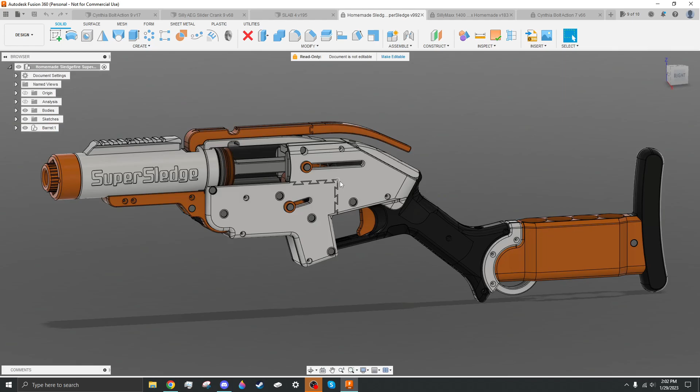You can use dovetails to attach larger prints. So if you have a large flat panel of some type, like this on the old Super Sledge design, you can split it in half and dovetail it together.

You can also use dovetails to make something removable or detachable. So on the Cynthia, on this older version of the Cynthia, I should say, I have a dovetail here to make the stock easier to remove.

And then on the SillyMaxx 1400, there is a large dovetail all the way down the length of the back of the blaster. And that's so you can remove that top cover and get to the air tank inside.

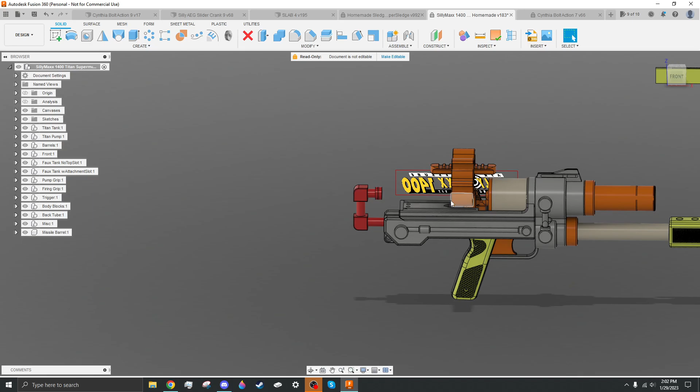And then, of course, you can use dovetails in addition to screws to just give something extra little bit of rigidity. So here on the slab stock, there are dovetails in between all of the core panels, as you can see there. And that isn't strictly necessary with how the screws are laid out.

You could totally build this blaster without any dovetails and just have screws hold it all together. But using dovetails removes some screws from the design, lowering hardware cost and making it easier to assemble.

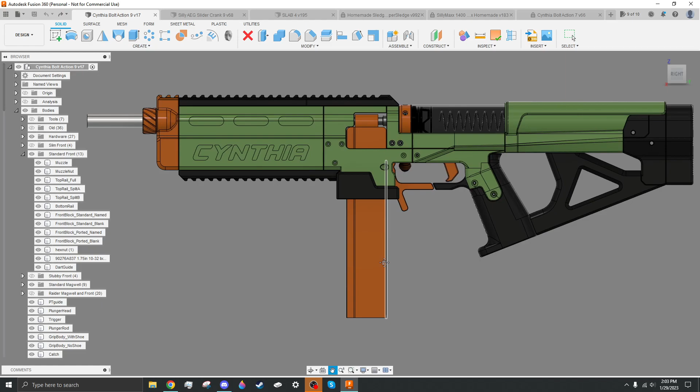So let's start going over the specific examples I have here, and I will at some point in this video show you how to make a dovetail. Most of this is going to be talking about the decision process to decide that you want to use a dovetail in a place versus actually making a dovetail, because making a dovetail is incredibly easy. In fact, it's so easy, I'm going to just start off with that.

So let's make some parts here. Let's make a nice rectangle and another nice rectangle of some type. Yeah, there you go. There's your rectangles. Those are pretty good rectangles.

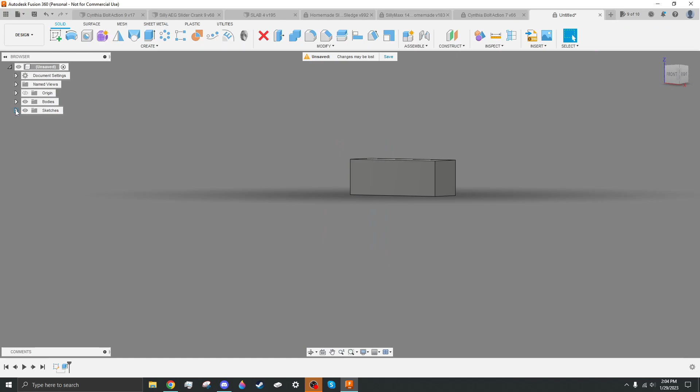So let's say that these are two separate parts. This is that, and this is that, let's say. And you want to attach these two parts together.

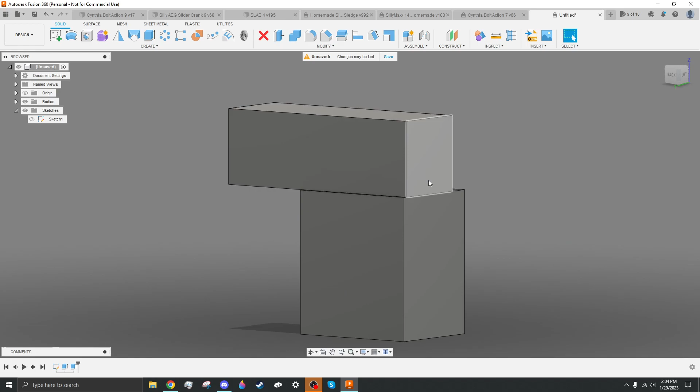Well, first of all, you could drill screws in from the top down, but that makes it so that it costs more hardware, and it might be misaligned and stuff like that. Or it might be wonky orientation. So if you have screws coming in from the side, like from up here, a screw there and a screw there, but it's printing on this face, then you have to print those screw holes in a vertical position, which doesn't often cause issues, but it can cause issues from time to time.

So let's use a dovetail. I want to take these two parts, and I want to make a dovetail. So what I generally do is I find the center line of the top part, or of a part, find the center line, and then what I'll do is I'll make one half of the dovetail and then I'll mirror it.

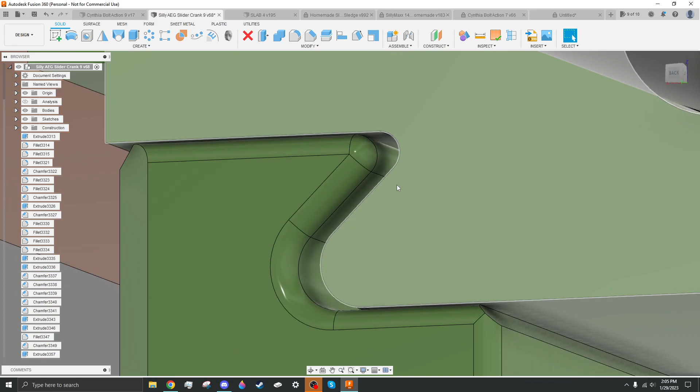On some designs, like this one of my AEG designs, you don't really need a symmetrical dovetail. You can have a dovetail that just has one pointy bit instead of a pointy bit on both ends. And that can be easier to print in some cases, but it's also just not necessary to have both ends of a dovetail be pointy.

So, whatever. I'll go over both sides pointy just for sake of explanation. So I want to make this dovetail go down here. Let's say 5 millimeters. Let's say 10 millimeters. Let's say 20 millimeters. I didn't use scale when making this, so I didn't recognize how large this is, but yeah. 20 millimeters. Let's go another 20 millimeters that way. Let's go down, I don't know, 10. Yeah, it seems fine.

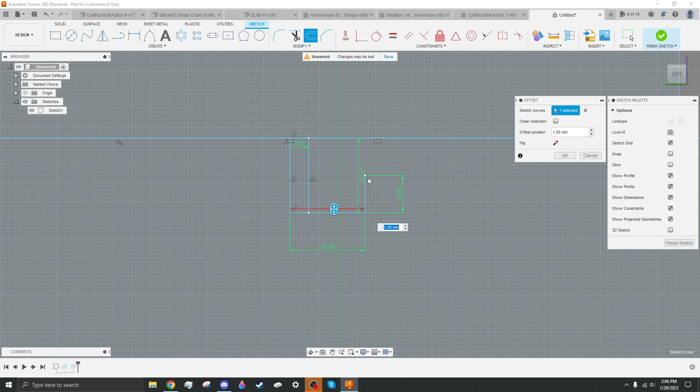Let's then take this bit and offset that. I want it to be 10 millimeters thick total. And since I'm going to be mirroring this, this needs to be minus 5.

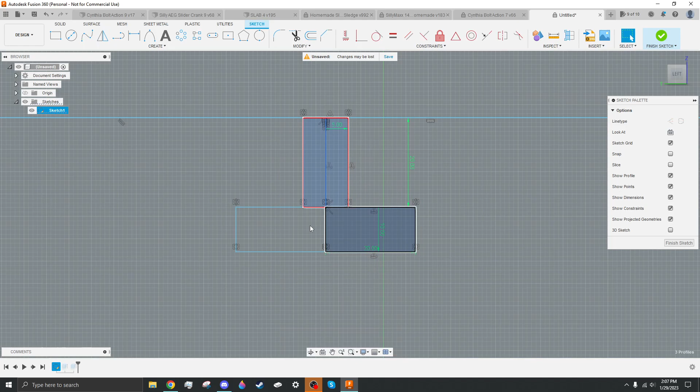So here you go, here is the basics of a dovetail. That little thing down there will grab everything here. So I will then mirror all of this along that line, and there you go. There is a basic dovetail.

So if I were to extrude that, let's do it as a new body. What I would do is I would then cut this into that, and there you go. There is a basic dovetail.

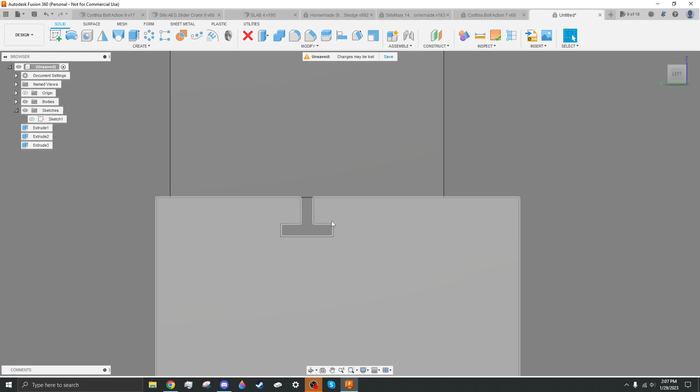That, however, is a very crap dovetail. Let me turn off design history real quick. What are the problems with this dovetail? First of all, there are no fillets, so this has lots of stress risers, 90-degree angles focus stress, and they will snap off. This is also relatively thin, and it doesn't have any tolerance to slide into this bottom piece. So let's fix all those issues.

I'm going to start this as a new sketch. So let's fix this one by one. I want to add some tolerance to the bottom piece. I'm just going to offset that whole shell like that. I'm going to open up my bodies, hide bits I don't want to cut, and extrude that down there. And there you go. You can see now that has a bit of a relief around the outside to more easily slide in between the two parts.

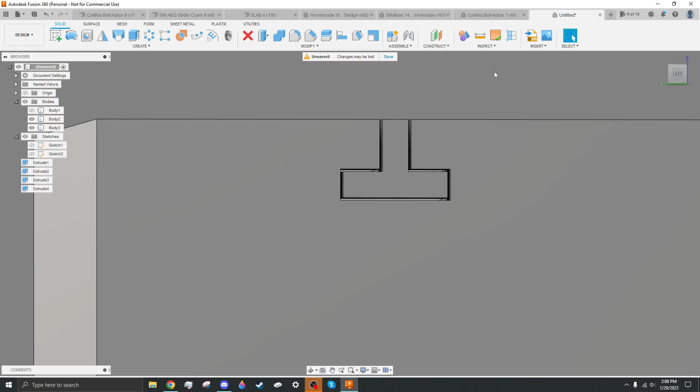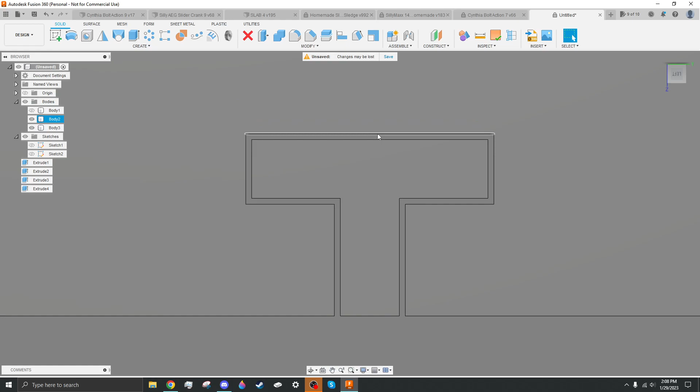It's important to note that, depending on the orientation of your dovetails, you want to add more or less tolerancing. So take into account if this print was like this, with this bottom portion being the build plate, there would be bridging along this top line right there. So you would actually want to give that more tolerancing that way to account for the bridging sagging down and taking up a bit more space. So if that had a 1 tolerance, I would probably give it 2 tolerance, and there you go. Something like that. So let's go over the next thing.

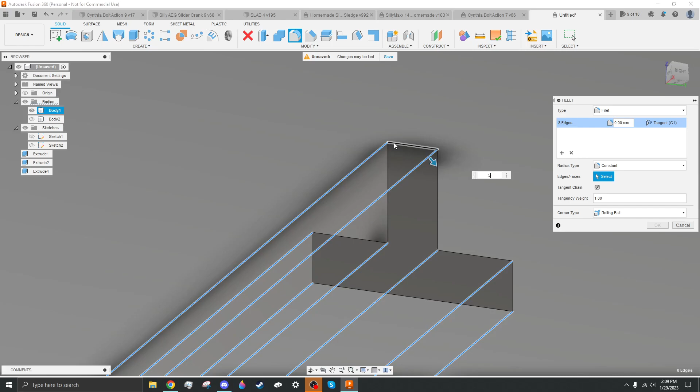It's not filleted. I want to fillet this. So I'm going to combine this with that part now, and I'm going to fillet this. I'm going to take the fillet tool, and I'm just going to fillet all of these corners. I forgot how big I made this. Yeah, let's do 4. There you go. That's nicely filleted now, that's a lot better.

However, I also want to make this middle bit wider. That right there is a lot more durable.

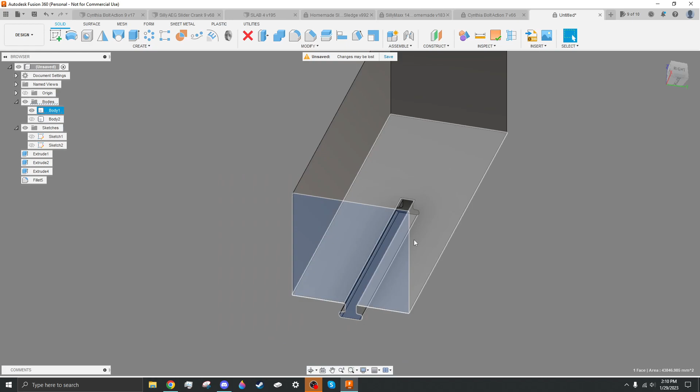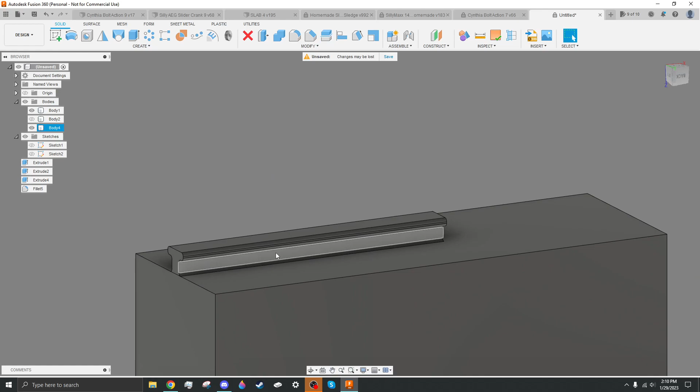Now, it's important to note that in this design right here, it would be strongest printed on this face. Can I align this? There we go. It would be printing like that, with that bottom being the build plate. And that would cause these portions to all be part of the same layer. So this whole highlighted area is one big layer, and that attaches the dovetail to the rest of the part a lot better than if it's printing like this, and this right here is a layer line. Because then it's just going to snap right along that line right there, because there's nothing really grabbing it to the rest of the blaster.

So yeah, this right here is an adequate dovetail. I would dare say it's a good dovetail. I would use this in a design. However, this doesn't really take into account wonky print tolerances, or I just realized I never increased the tolerance for this part to account for the new shape.

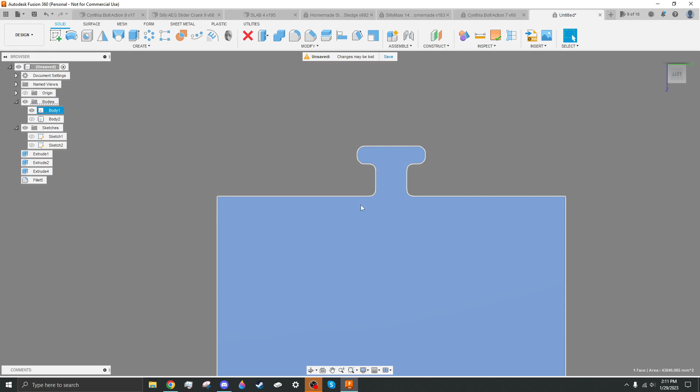This shape of dovetail right here, this sort of T shape, doesn't take into account different print orientations. So if I wanted to print this with this bottom face down here being the print bed, discounting the fact that layer lines would probably snap there, but whatever, maybe it doesn't particularly matter, maybe it's a very low stress use case. But let's just say, for sake of argument, that I wanted to print from bottom up. These flat faces here are bad, they cause issues. So let's remedy that.

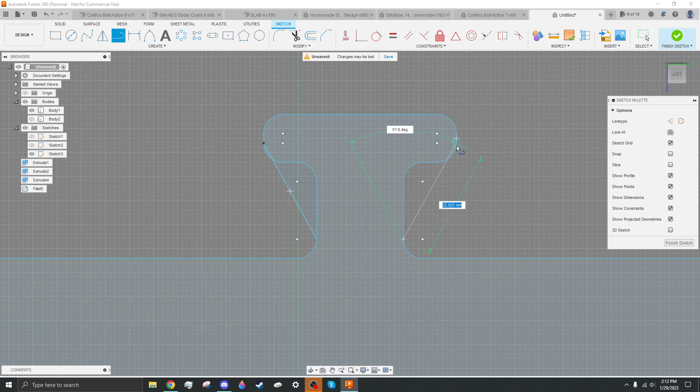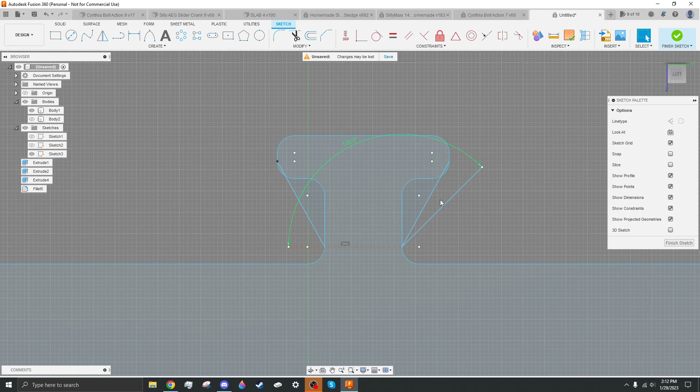Actually, I'm going to just copy everything there. So let's just say that I wanted to make this like that. So what I'm going to do is I'm just going to drag that down like that. And I want this to be able to print vertically. So generally 45 degrees is the most aggressive angle that you can do vertically. If I wanted to do it like this, that is 45 degrees in between this and that, that's the most aggressive. This is not 45, and that will print a lot nicer like this.

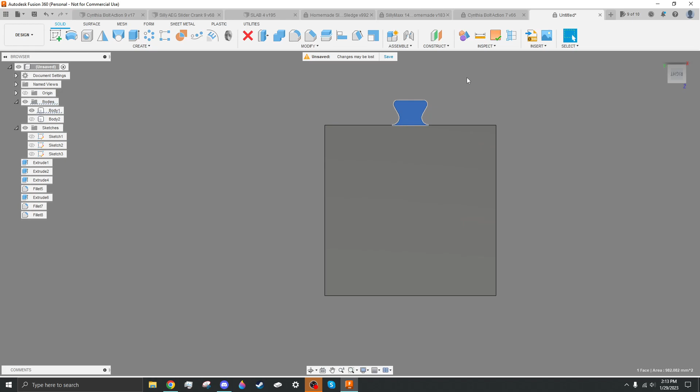So I would then take these, extrude them back, clean up the edge a little bit, re-fillet it, and on this I would give it a much more aggressive fillet. And then let's get rid of these hard edges as well. There you go. That is a really good dovetail. That right there will work excellently in pretty much any use case.

So there's also some more wonky shaped dovetails that you can do. Like here on the SillyMaxx, if I hide all of these bodies, you can see it's more of a one side has the pointy bit, and it's just kind of weirdly shaped. That will work excellently because it's also mirrored on the other side, so it has two pointy bits pointing into the middle, and you can see this shape of this piece is shaped like an inverse dovetail, I guess you could think of it, and that works very well.

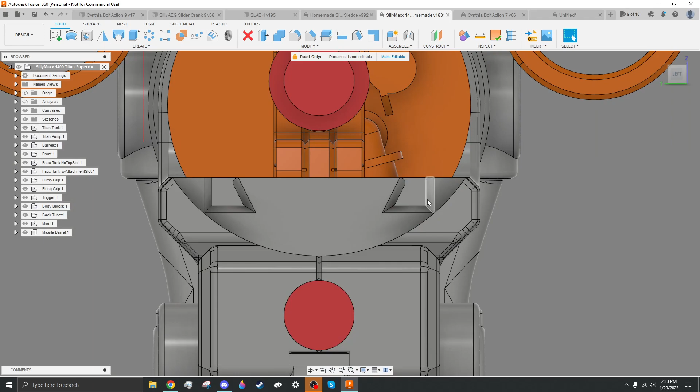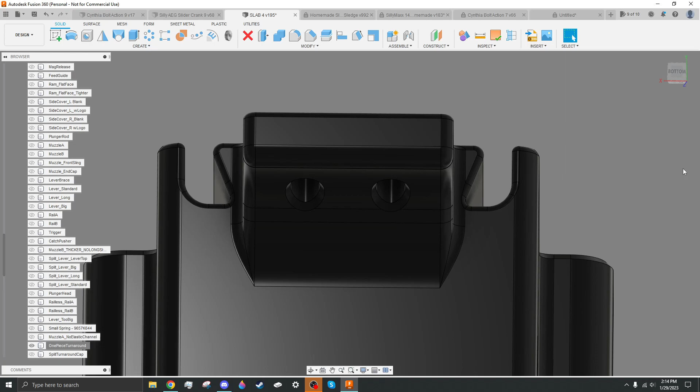That same shape is also what I did on the slab magwell. If I grab this, as you can see, the dovetails in the slab magwell are also this sort of inverse dovetail shape. If you were to take this on your screen, it goes down, up, over, down, over. Inverse dovetail. So this also works great. If I pull up a magwell, one of these pieces, you can see the shape of that. It's just two little grabby arms.

And that is plenty durable because this magwell prints with this bottom face on the print bed. So all of these are all different parts of the full layer. So it's not going to break along this face and just break across there. No, it would have to break all of this in order for this dovetail to come off. So it's plenty durable.

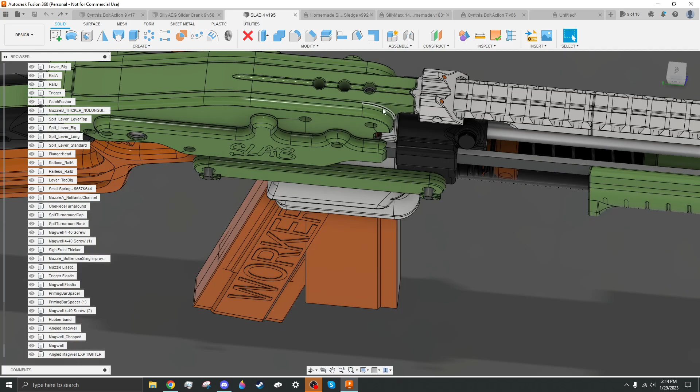So now that I've shown you how to make a dovetail, and I haven't shown you how to make all the dovetails, however, it's very easy to figure out. You just make two triangles, put them end to end, add a bit of space in between them, fillet the edges. You got a dovetail. And then cut that with a path through the piece that you want to dovetail to, and then give that a bit of tolerance on the edges. And then boom, you got a dovetail.

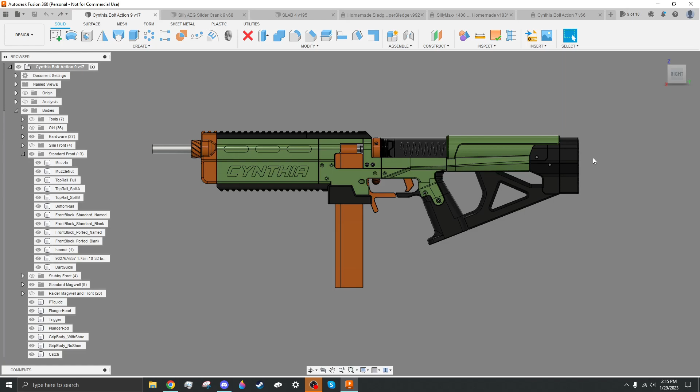So now let's talk about the decision making for making a dovetail in your blaster. On each one of these examples, I'm going to close this real quick. On each one of these examples, the dovetail is used in a different way. So let's go over that. First off, I'm going to show you how I used a dovetail in the back of the Cynthia stock. So if I hide all of this right here, there we go, and all of that as well. Beautiful. And let's change the color of these so it's easier for you to see. There you go.

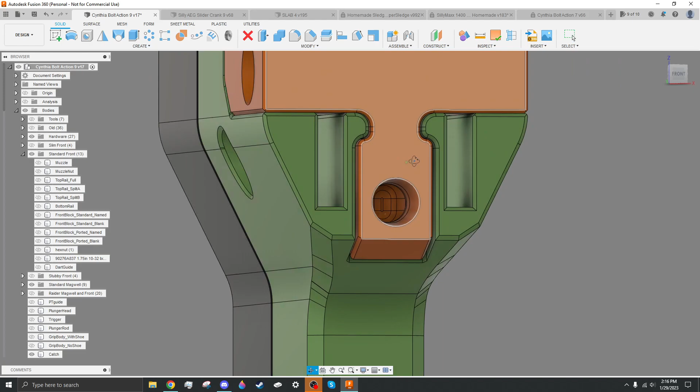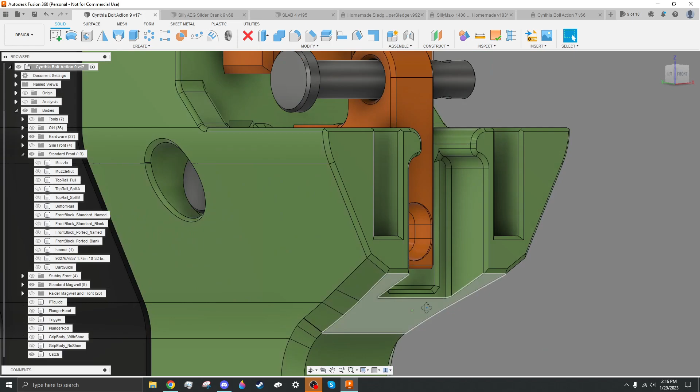So as you can see here, this little shape right here is a dovetail. It's not necessarily a dovetail in the strictest sense of the word, but it's a dovetail in practice. This was done because this part has active upwards force put on it, but not a lot of it. So this part is actively trying to go up like this whenever the blaster is primed and fired, but I don't want it to. And there's no space down here to fit a screw. As you can see, this contour down here is very tight up against the space that's available inside the blaster. So there's no space for a screw in there.

Therefore, dovetails. So this part, this orange part, prints on that face. This green part prints on this face. And dovetails just grab onto the part and don't let it go up. So I wasn't able to fit screws in this area, so I used a dovetail.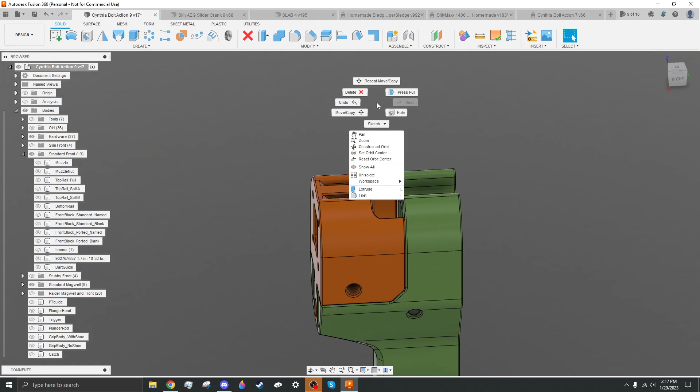Another place on the same blaster that used a dovetail, because I couldn't fit screws in the place, is up here. There is a dovetail up here, as you can see, and that attaches to this piece. As you can see, grabbed by the dovetail. And that's because this green piece up here is also trying to be pushed up. And it also makes it easier to assemble by just sliding it together like jigsaw pieces instead of having to put screws together. So dovetails are a lot easier to assemble in my opinion, and they also help you reduce screw count, which is very nice.

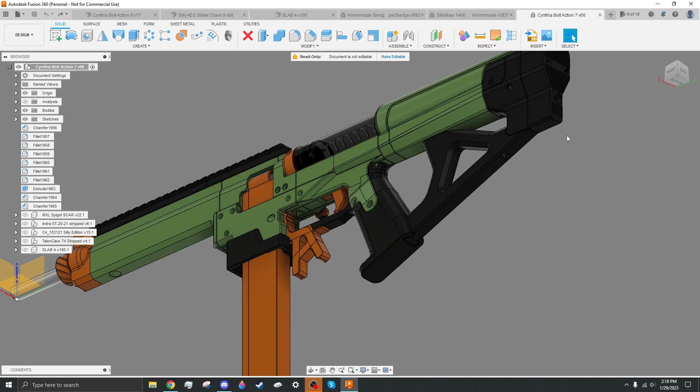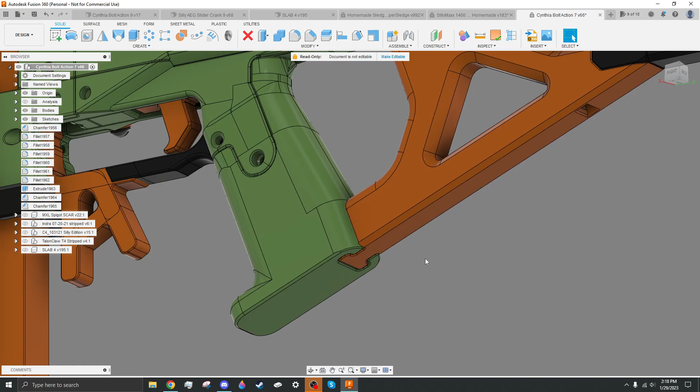And before we leave Cynthia completely, I'll also go over to this old version of Cynthia where I tried using a dovetail to make this stock easily detachable. The problem with this dovetail is that it was easy to misalign, and then you could feel it along the bottom. So it wasn't comfortable to hold. But the dovetail worked just as intended. It was perfectly strong enough to hold the stock aligned.

This piece didn't come out, but it just wasn't as precise a method of assembly as I really wanted for the stock. So I switched to a bolt in the future versions of the Cynthia, but there's a dovetail in this version. So as you can see, this grip piece prints along that bottom face, and I have done a big angle to the edge of the dovetail to make it print better in that orientation. And that works just fine.

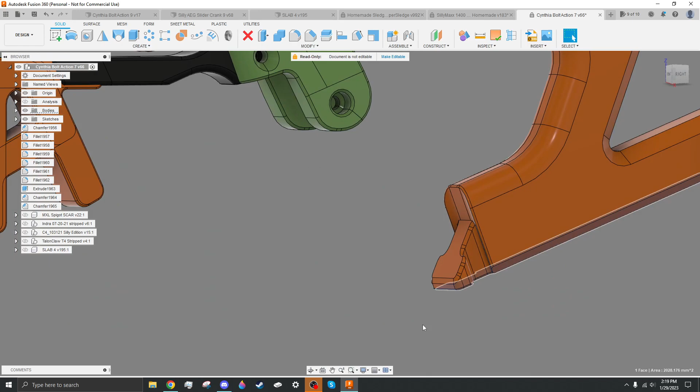And then this piece also prints just like that on that face, and that just has a slope to match. And that goes together beautifully. That is a very good use of a dovetail to both remove hardware and make something removable easily.

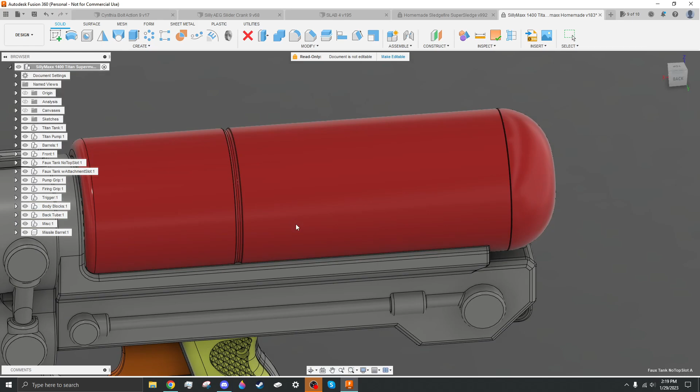All right, so now that we're done with Cynthia, I guess we'll move right on over to the SillyMaxx 1400. On this blaster, this whole red top cover piece, let me just hide some stuff. There we go. This whole red top cover piece is easily removable from the rest of the blaster to access the air tank inside of it. So this whole red piece, including that part that got left behind for some reason, just slides off the back of the blaster.

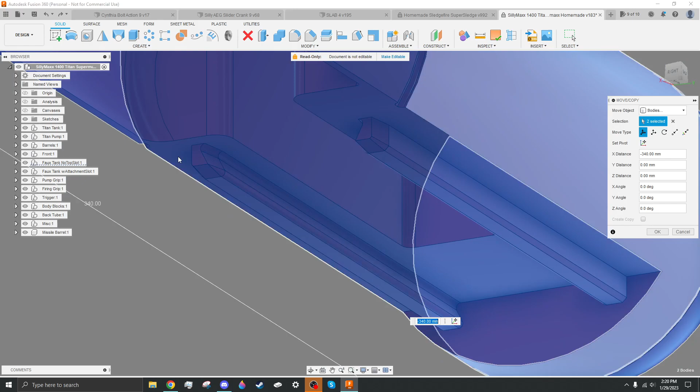As you can see, there are two massive dovetails right there, there, and there, with two matching massive dovetails there and there. And this lets you keep the top cover in place securely when you don't want it removed, but it's also very easy to remove when you do want it to come off. These two massive dovetails make it very hard for it to rip off the top of the blaster, like this, because there's a lot of meat in these dovetails. However, it's very easy to slide it off the back of the blaster when you want to.

So that's an example of a dovetail being used in a place where you need to easily access something all the time. I would also use a dovetail in this sort of setup when I was doing something like a battery door on a flywheel or an AEB. Using dovetails for that and maybe a thumb screw to lock it in place works very well. In that sort of scenario, I would use just dovetails if it wasn't a very heavy use blaster.

But if it's something where you're planning to run around and possibly drop it, or it gets bumped around or something like that, if you want it to be durable, I would use a thumb screw to keep it in place, and then use dovetails as an accessory to that thumb screw. The dovetails would help align it and also add extra stay-in-place power to that thumb screw. So the thumb screw's real job would just be not letting it move back and forth, and the dovetail's job is to make sure that it can't pull out, if that makes any sense.

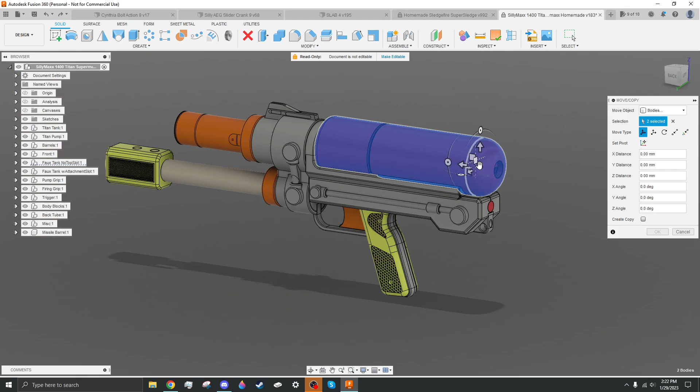So if I show you on this, what I'm saying is I would use a thumb screw to keep it from going like this. The dovetail's job is to keep it from going like this. So yeah, that's the SillyMaxx 1400, and that's the dovetail on that.

On the Super Sledge, this large side panel takes a lot of force.

Apologies, my phone just made a ding sound.

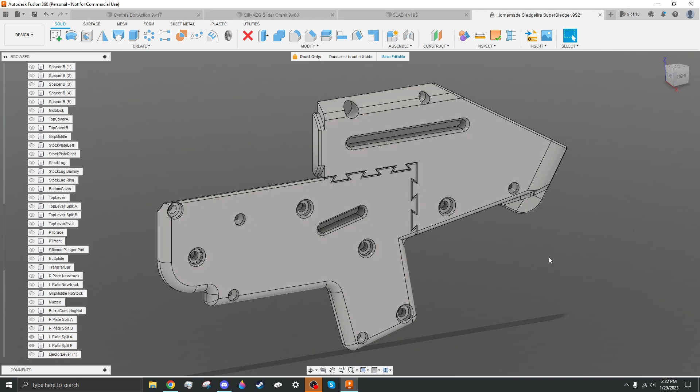On the Super Sledge, which is an old design of mine that I abandoned due to other issues, this part worked great. This is a very large side panel and it takes a lot of force. Basically, the entire force of the blaster, all of the spring force, all of the firing impact, everything is put on this side panel. So normally I print the side panel as one giant piece. However, that doesn't fit on a lot of printers. So what I did was I used dovetails to stick these two parts together.

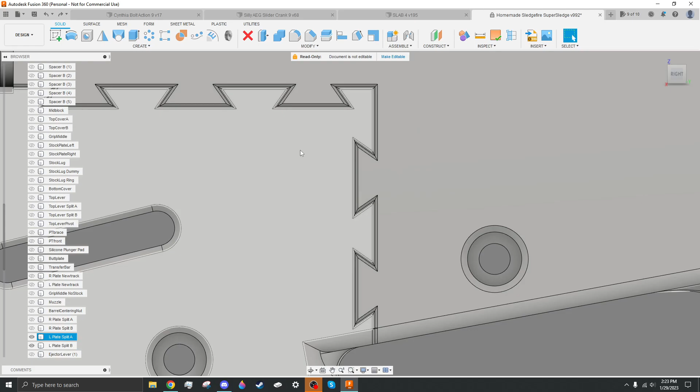This setup worked fantastically. It didn't really make the parts any weaker because there is basically no tolerance in between these parts. These are extremely tight dovetails, so you would hit these together with a hammer, and that makes sure that they're extremely durable as well. If there's no tolerance in the dovetail, it's going to be nice and strong.

These are both in the correct print orientation as well. They're both flat prints, so they're printed on that flat face like that, which means that all of these dovetails are part of the rest of this piece in terms of layers. So they're nice and durable, they won't break off, and they're all working together.

There's a lot of dovetails in this small area. It's a beautiful piece, and it stays together excellently. So that's an example of dovetails being used to split a piece that is otherwise too large to fit on a printer. So yeah, that's that.

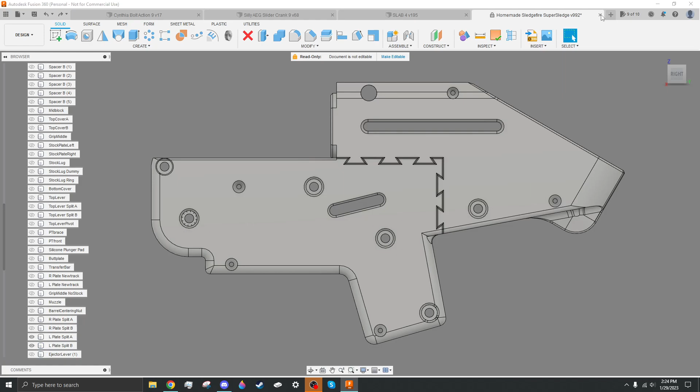We already went over two parts of the slab, but I guess I'll go over them again. In the back stock area of the slab, it is done with sandwiched together layers. So there's a core, and then a layer on the one side and a layer on the other side. The core of the slab stock is held together with dovetails. That both aligns the stock and makes sure that it's not wonky in any of the ways, but it also makes it much stronger than if I had just used screws.

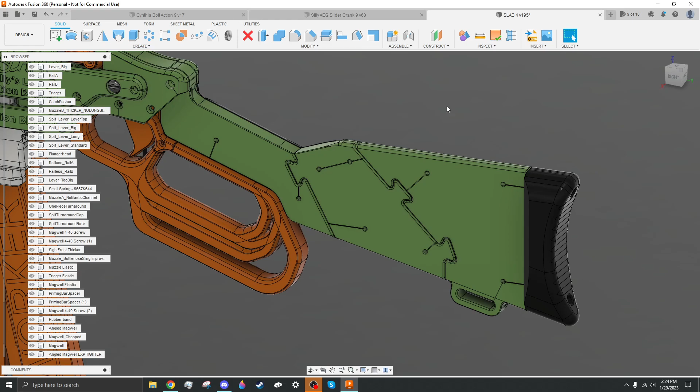The slab stock itself, if it was just screwed together with the three layers, so you got your core, left side, right side, if it was just screws and you knock this against like a concrete floor or something like that, all the screws might break and this piece can just shear off like that, which isn't great.

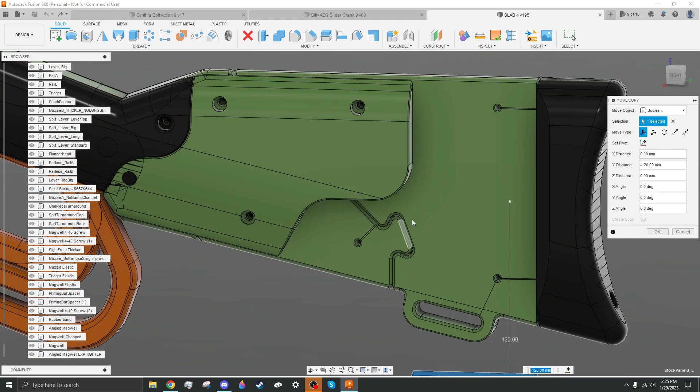And more so if there's no dovetails here, because it would be this piece and this piece all being together as one part, but with no dovetails. So it's all sort of just flopping on these two screws down here, and then these two screws up here. So if you knock this, it would just snap off like that, which isn't good. So the dovetails in the slab stock keep it much more sturdy than if they weren't there.

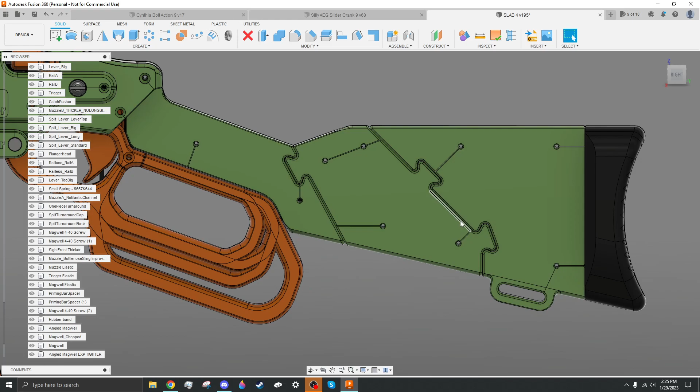So as you can see, there's one dovetail in the front, two dovetails in the back, and that all holds it together nice and strong. So that's an example of both using dovetails to remove hardware. I don't need as many screws now that I have dovetails there, and also using them in conjunction with screws to make something a lot stronger than if there were no dovetails.

And then over here on the turnaround and the magwell, I went over this already, but the dovetail here is a nice long dovetail. It's a very skinny dovetail, but it's very long. And that keeps these two parts together very well. There are screws down here that keep the dovetail aligned and keep it from sliding apart on its own. But most of the force keeping the magwell attached to the turnaround here is from those dovetails.

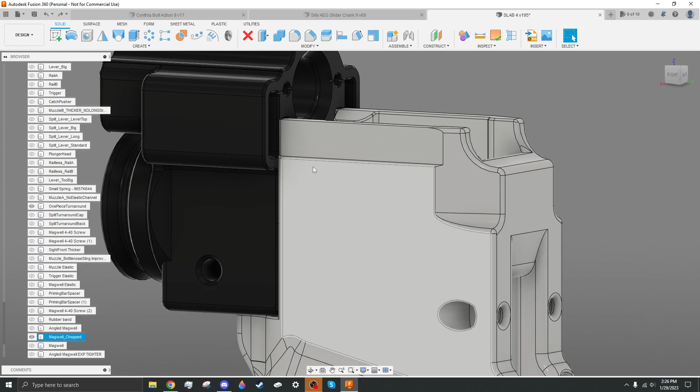And I did this because there's no space here for screws otherwise. I originally had screws going in these sort of chunkier bits up front, straight down like that, but those snap off. There's no real space here for anything other than dovetails. And dovetails work great here.

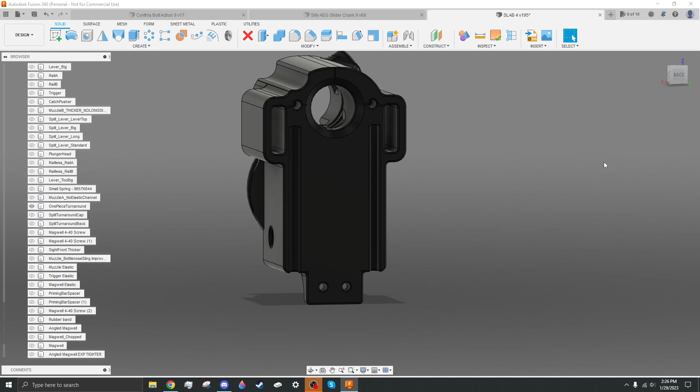One thing that I do want to touch on in the slab dovetails while we're still here is that on these dovetails, since they're so long, they can get a bit wobbly, which is bad. You do want to have enough tolerance, that is the hole being more open than the dovetail itself trying to go in the hole. You do want to have some openness there so it's easy to put together. However, you don't want it to be so loose.

Sorry, my phone went ding again.

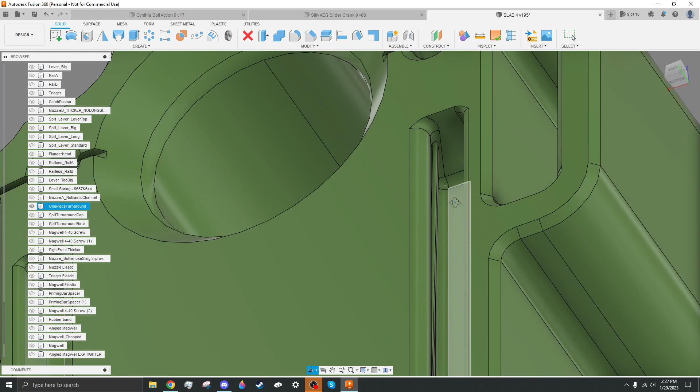You don't want it to be so loose that it is impossible to stay aligned, and stuff will get misaligned, darts will jam if it's not aligned correctly. If it's not aligned as well, if it's floppy, repeated use might break it because it's putting uneven load on the whole dovetail. So on this, I have these two ridges right here, and another one on the other side.

And those tighten the dovetail. As you can see here, they stick into it as it reaches the top of the dovetail, this side down here being the top. It sticks into the dovetail and keeps it nice and tight as it's inserted. And that is a wonderful thing to do if you need a dovetail that is loose enough to assemble, but you don't want it to be wobbly. Just add little ridges inside the dovetail channel to tighten it.

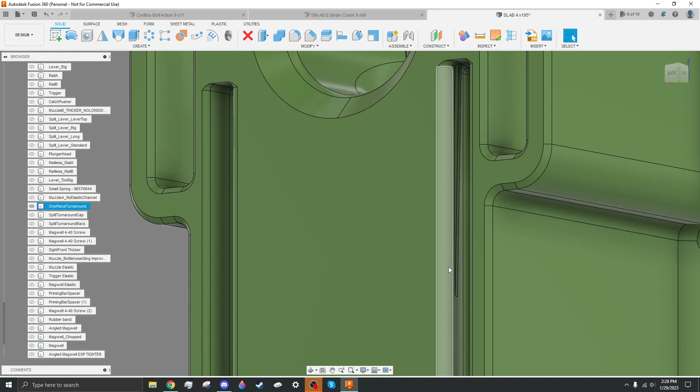Let's move on. I'm also going to close this Cynthia file. This is the last example that I have for this video. This is one of my AEG designs I'm working on, and this has two dovetails that I really want to show you. The first dovetail, I think I already showed previously in this video, is back here on the grip.

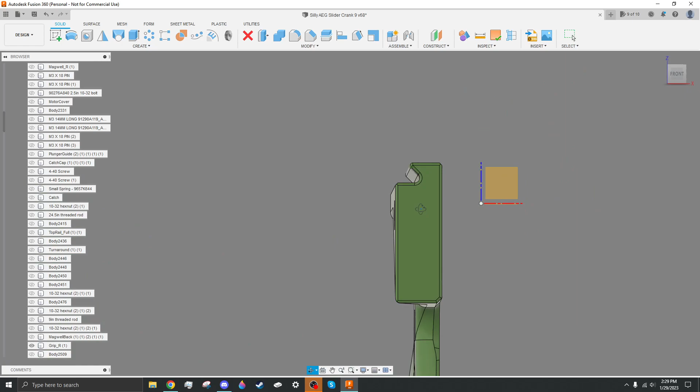This grip here is made out of grip panels, like this. And these are flat prints. This would print along that face right there. And these have giant half dovetails along the top edge, and that goes into a giant half dovetail on the body piece that it's attaching to.

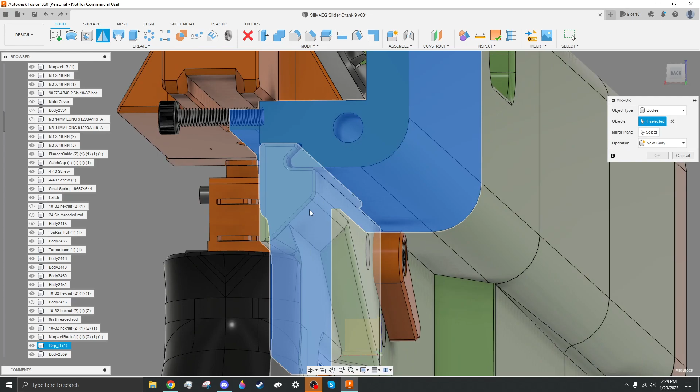Now, by itself, one half of this wouldn't be very strong. However, if I were to mirror this, which it will be once it's assembled, and hopefully not crash Fusion 360. Oh, interesting. Let's try that again. If I were to mirror this, this whole area is extremely sturdy because the way that this is assembled is these two grip panels are sandwiched into a grip assembly. So all this bottom area is all one solid chunk, and this top area is one big solid chunk.

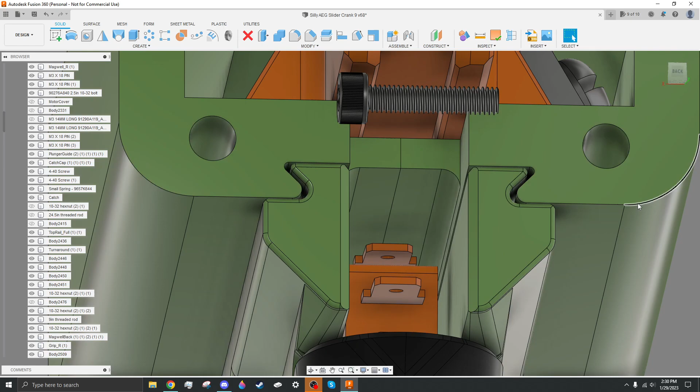So this ends up being just a massive dovetail in practice, where it's going all the way down here, up and across, all the way across, and then down there. It's a massive dovetail, and that makes this grip area both easy to assemble, because you would just slide this all on from the back, just like that. You got your grip assembled, and it also makes sure that I can't rip it out the bottom, because if I do, I have to fight against these massive dovetails if I wanted to rip it out the bottom like that.

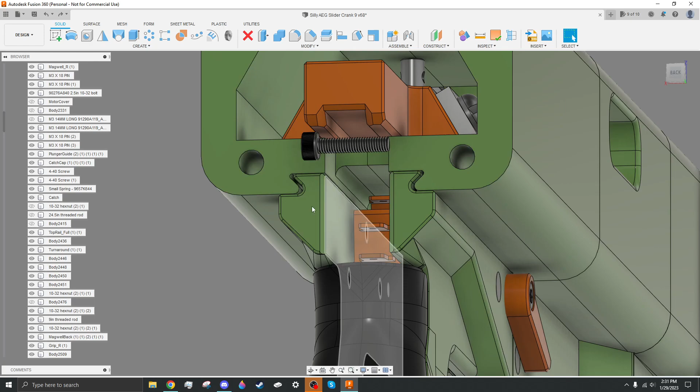And of course, this grip is also held in place by screws. That's what these holes right here are for. Those screws are to keep the dovetail aligned and make sure that there's no weird seams on the blaster. But most of the force holding it together is these dovetails. So these are great dovetails. This is a case where I knew that in order to have it be strong enough, if I wasn't using dovetails, I would have to use a bunch of screws.

And that's hard to assemble for someone. No one really likes putting in a ton of screws. So I try to avoid using a ton of screws as much as I can. However, I also don't like using big hardware, because hardware costs money. So if I could replace a bolt with a screw, I'm going to do that, because, let's say a bolt is 5 cents, a screw is 1 cent. Add that up over an entire blaster, you maybe cut $5 off the hardware kit cost. That's pretty good.

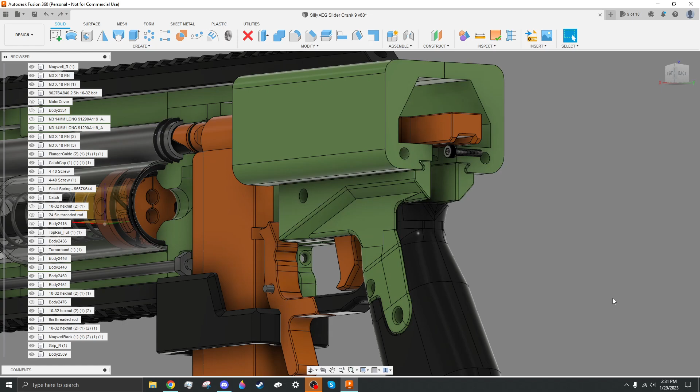Dovetails are free. So 1 cent is bigger than 0 cents, and added up over an entire blaster, that's maybe an extra $1 off the hardware kit cost. That's how you get hardware kit costs lower as a whole across an entire blaster: you just shave off every little bit that you don't need, and then you get a nice cheap hardware kit. That's why the slab hardware kits are nice and cheap,

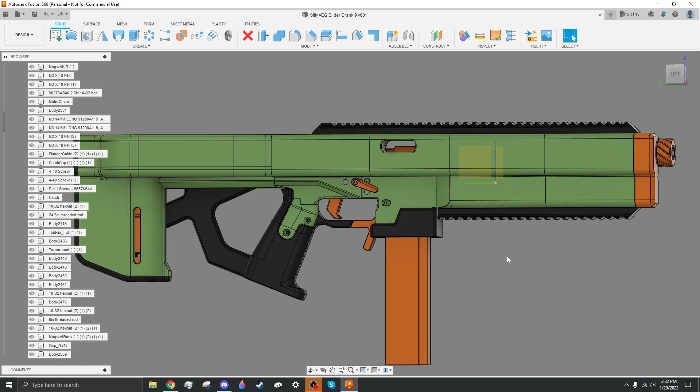because I spent 3 months shaving one screw off there and removing a bolt over there and making the threaded rod a little bit shorter so you can get more out of the stock that the shop needs to cut. I managed to bring down the hardware kit cost from like $55 to $45, and that's a big difference for some people. So it's worthwhile doing that sort of design.

And the last dovetail that I want to go over isn't actually one of mine. This is a dovetail by Taffy, from Caramel Designs. That's what this magwell is based off of. This is a magwell from the Skewer, which is one of his designs. The dovetail here is actually what holds together the magwell. So if I go over here, I'm just going to mirror this piece so you can see it better. Like that.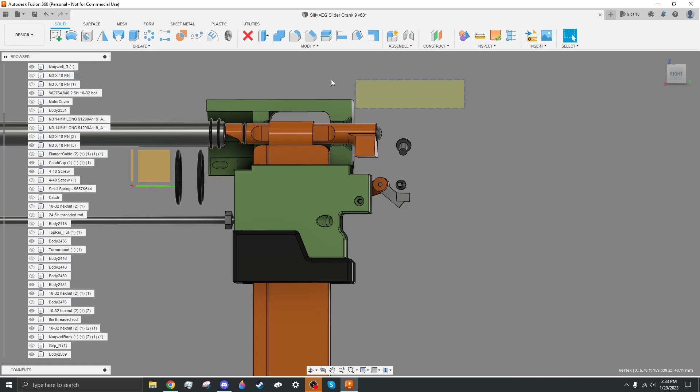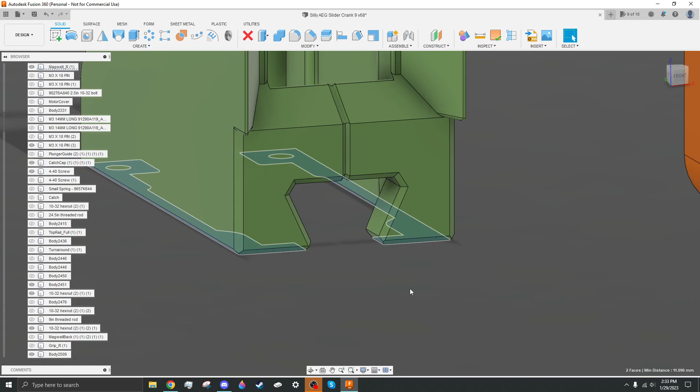There we go. So these are two pieces. On the skewer, which is the original part of this design, these two parts would be connected, and it would print on this face down here. So this top edge with the dovetail would be a bridge. But on this design, there are two flat panels. So this is printed on that side, and this is printed on that side. It's a flat panel like that. But nonetheless, dovetail works the same.

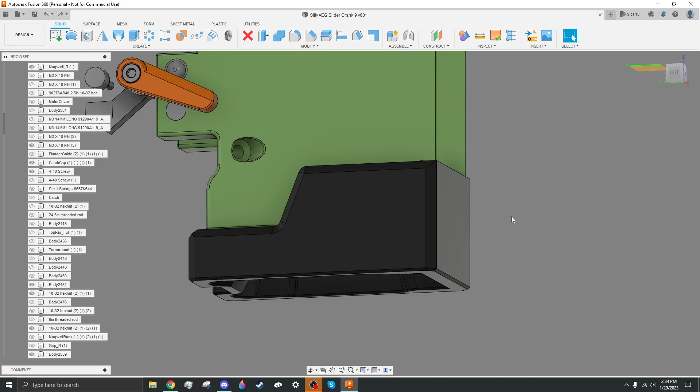On this, he managed to reduce the amount of screws on the magwell to just 2. So you have one screw here in the back and another screw here in the back, and that keeps it on the blaster. And then this dovetail in the front makes it so you don't need screws in the front. You can make the front a lot shorter, and it's basically the only way that you could add this extra bit of color to the bottom of the blaster without adding a bunch more hardware or making it harder to assemble. This is just a mastermind of a dovetail right here by Taffy.

It's a great design. So that's another thing that you should take into account, is you don't necessarily need to have all of your dovetails symmetrical. He has one dovetail here, not 2 dovetails. He doesn't have another dovetail in the back. So you don't really need to go gung-ho all the way into dovetails for an entire design.

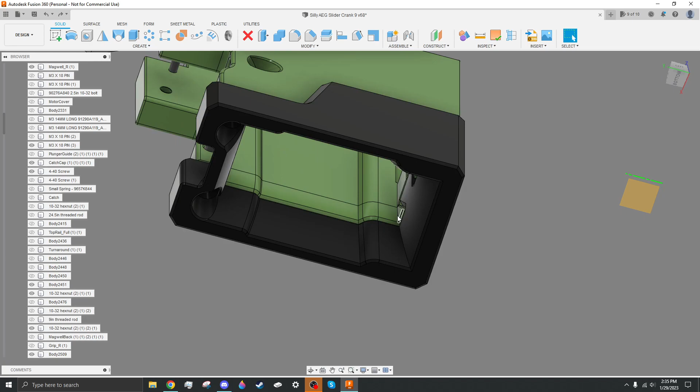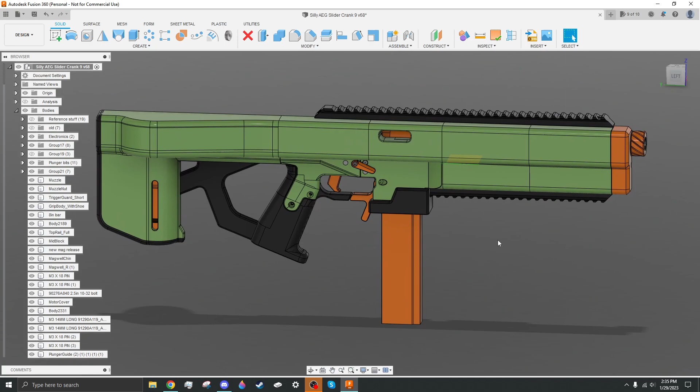You just need to start thinking in a way where, okay, let's say that I have 4 screws here. I don't really need 4 screws here. I can have 2 screws in the dovetail. And that's getting back again into that whole shaving off 1 screw in every place gets you a lot less screws overall in the blaster, which makes it both easier to assemble and easier to afford, less expensive. So yeah, that is pretty much all that I have to say about dovetails.

I suppose one last thing that I forgot to cover was using dovetails as a priming handle bar thing. Let me grab one of those real quick. Where do I have that? I have that on this. This is a work in progress design. This layout doesn't actually work. This is a really crappy brainstorm. So ignore all the stuff that you see here. This is bad. This is very bad. But this is what I'm talking about down here. Using a dovetail as the mount for your priming handles.

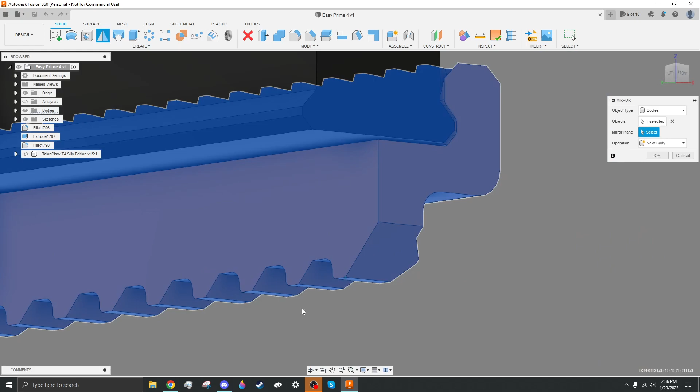So stuff like the Caliburn from Captain Slug has the priming handle sitting on threaded rods or aluminum bars or U-channels. But on this design and a few other designs that I've made and that work, I have my priming handles just sitting on a dovetail. Now the issue with this is you really need to take into account the print orientations here. So let's think about this.

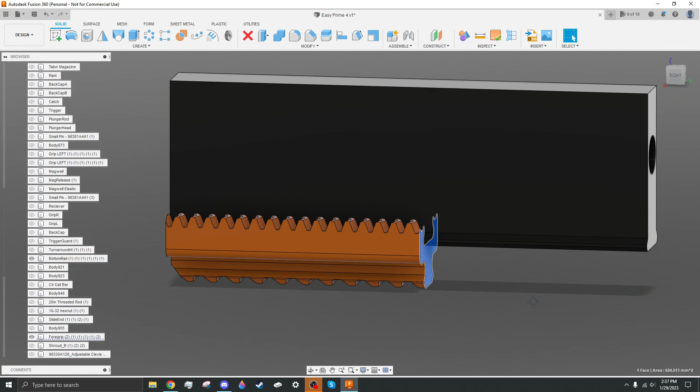3D printed parts, and I'm going to pick up a few and make sounds with them real quick. If you have two 3D printed parts and they are both printed vertically and they rub against each other, you get a very nasty sound. No one wants that when they're priming their blaster. However, if you have two 3D printed parts and one of them is printed vertically and one of them is printed flat, this flat side is both a lot smoother and the layer lines aren't aligned. So, again, when the print orientation is the same in between the two parts, you get this nasty sound.

But if the two layer lines are opposite of each other, so let's say you have one vertical print and one print that is 90 degrees from that vertical print, so you have the print bed side or the top side of a print up against the layer line side of a print, it's a lot quieter and a lot less friction in between the two parts. Not sure if my microphone's even picking this up, but it's a lot smoother.

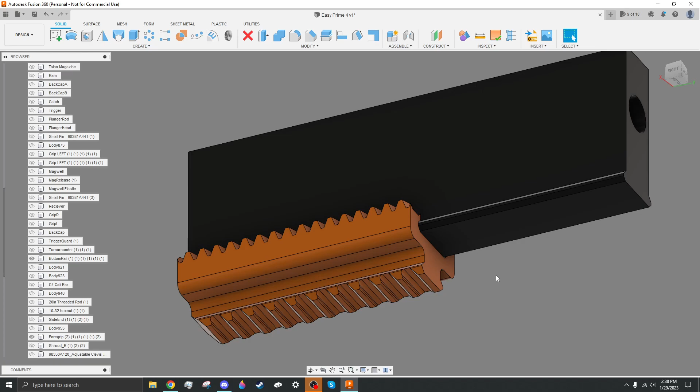So that's what I did on this. This black part here prints on this face, prints vertically like that, which means that the layer lines on this are going this way, back and forth. The layer lines on this bottom piece, this is the print face. So the layer lines on this are going up and down on your screen. They're going like this. So the layer lines on this black piece are going like this.

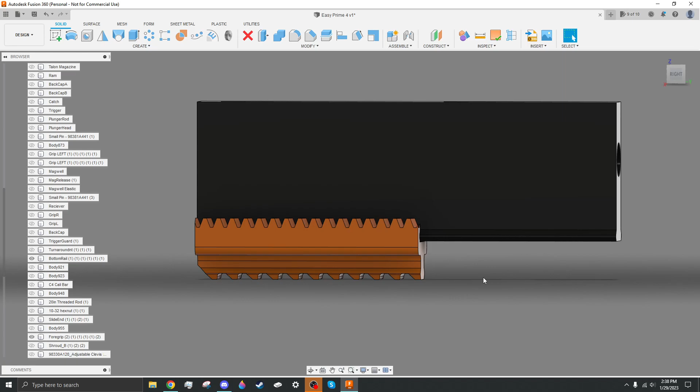Layer lines on this orange piece are going like this. When they rub up against each other, they're extremely smooth. Because when you have your layer lines the same between the two parts, it adds a lot of friction. But when you have them opposite, 90 degrees from each other, it's extremely smooth.

So this sort of setup actually has less friction than a Caliburn - or that's a bit of an overstatement, since there are so many different Caliburns. This setup has less friction than, say, a threaded rod Caliburn, because it's both less friction from the pieces rubbing together,

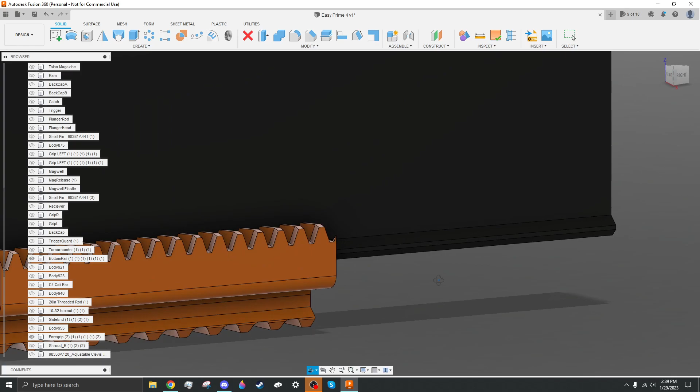but it's also better aligned than a Caliburn, because if you're priming a blaster, a Springer, a pump action Springer, your priming grip is putting force on the blaster like this, trying to pull it up against whatever you're priming on. So on this, it would be pulling up against this face, and this orange bit is trying to go up as it's coming back. But because I have such low tolerances here, there's no real space for it to do that and cause friction.

However, on a Caliburn, the threaded rod holes are a lot wider than the holes in the priming handle, and it can't bend, but it can misalign, which causes a lot more friction.

You'll also notice this on something like an SBL from Gavin Fuzzy. If you compare that against a Caliburn, the SBL has bushings between the priming handle and the threaded rods to make that tolerance a lot tighter, so it can't tweak or misalign and cause friction. So the SBL ends up a lot smoother than the Caliburn.

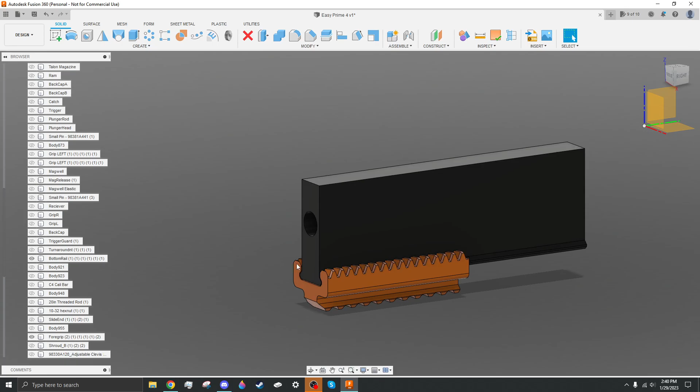That's the same situation here, where this space is so tight, relatively speaking, that it can't misalign itself. However, it's still loose enough and low friction enough to prime smoothly back and forth.

And that's all thanks to dovetails. Because if I didn't have dovetails here, I'd just be able to pry this off the bottom and have it bend my priming bars and all that, which would be great, or which would be awful. But due to dovetails, it's able to stay in place, and it's great.

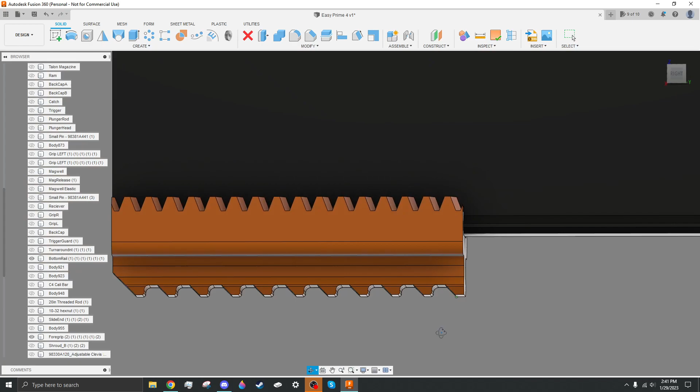I should also mention that separate from all of that, this dovetail is actually just a piece of Picatinny rail, but without the Picatinny notches on it, and slightly scaled up. So yeah, take that into account. Picatinny rail is a dovetail of sorts.

So if you want to dovetail something together and, for some reason, don't want to design dovetails, you can just take a Picatinny rail file and remove all the notches from it. Just remove all these notches and then you get a reasonable dovetail. That can also be used for attaching things.

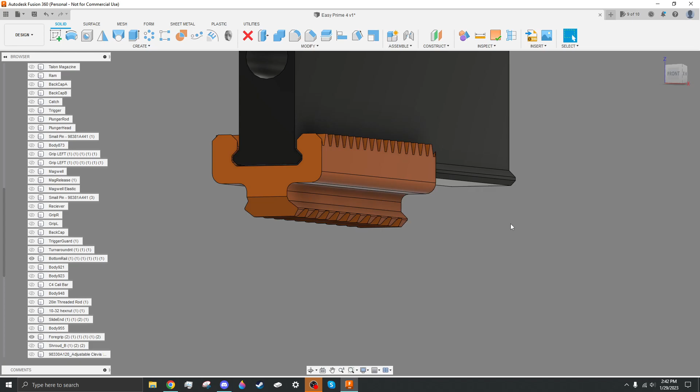So if you have, let's say, a modular blaster where you have a bottom half and a top half, but you want to be able to remove the bottom half and replace it with a pump grip, you can just use the bottom half attached to the top half with Picatinny. You don't necessarily need to use the holes in the Picatinny - you can just have it dovetail together. And there you go, you've got a dovetail. It's not necessarily the greatest dovetail, but it's a dovetail nonetheless, and you can use that in your modular blaster.

So yeah, that is pretty much all that I have to say about dovetails.